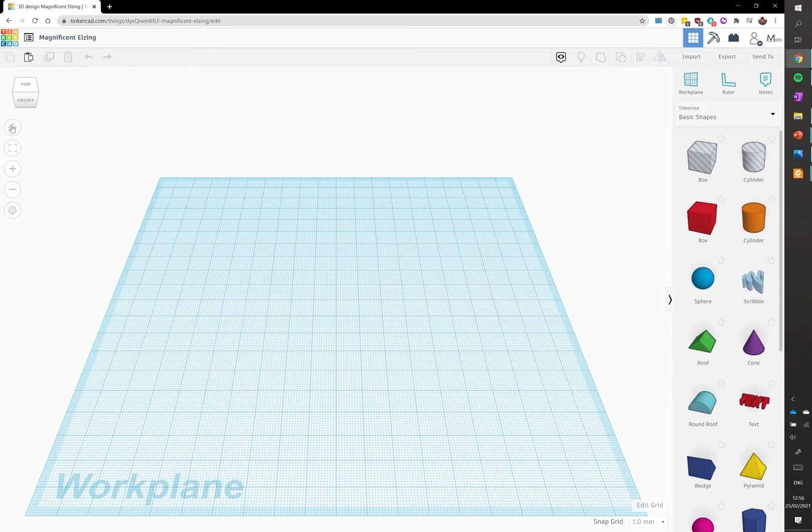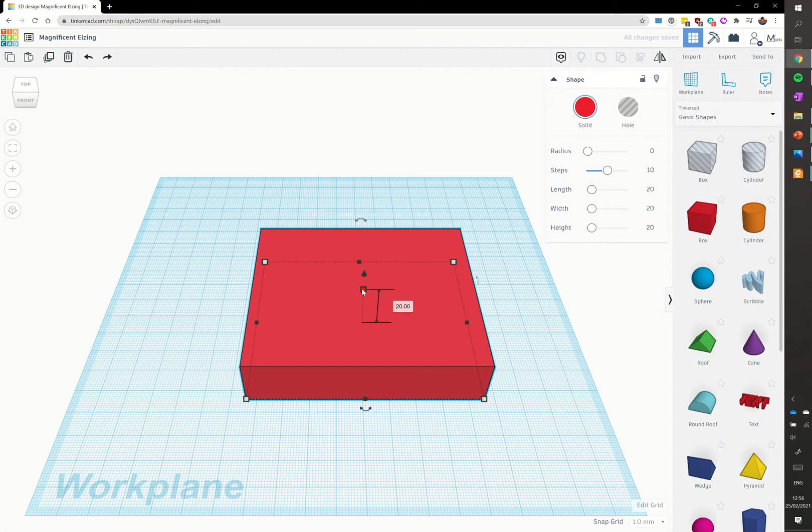Okay, we're just going to undo that. The height, if we click on that, is 20, and that's exactly what we want. Our block is made of wood, so we'll go into solid and change the colour to this kind of light brown to represent the pine we'll be using in the workshop. So that's our base stand.

Next up we have the two sides of the base. Again we're going to go for the box tool, drag that out and position it there. We want to change the dimensions again, so this here is going to be 80 long by 25 wide, and it's going to stay at 20 tall.

What we're now going to do is move this up. We can drag this up and you see it's coming off the floor, off the surface, so we can change that to 20 - you can just drag it to 20, though I find it easier typing it in. That changes to 20 there, and then we can drag that over our block.

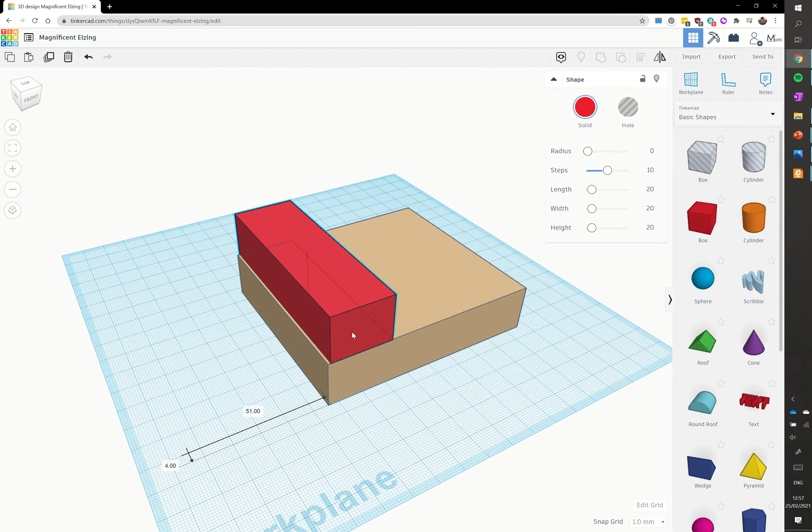Now, it can be quite hard to line things up if you're using a mouse, or a trackpad. I've lined it up there, but if yours is off, what you can do is use what we call the align tool.

So we've got that block selected, you can see the white markers around it. I'm going to hold shift on the keyboard and click on the other block, and that's them both selected. Then I'm going to go up to the menu and click align. I'm going to click on the main base block, then click on the left hand side, and you can see it's previewed it - it's going to move it inside there. I'm going to click on that one there, previewing it again, and it's lined up by those two corners. Okay, what I'm going to do now is click on that block there.

I'm going to go up to the left hand corner of the menu up here and duplicate. If I click on this, you'll find it has duplicated the item first, so it's kind of copy and pasted it.

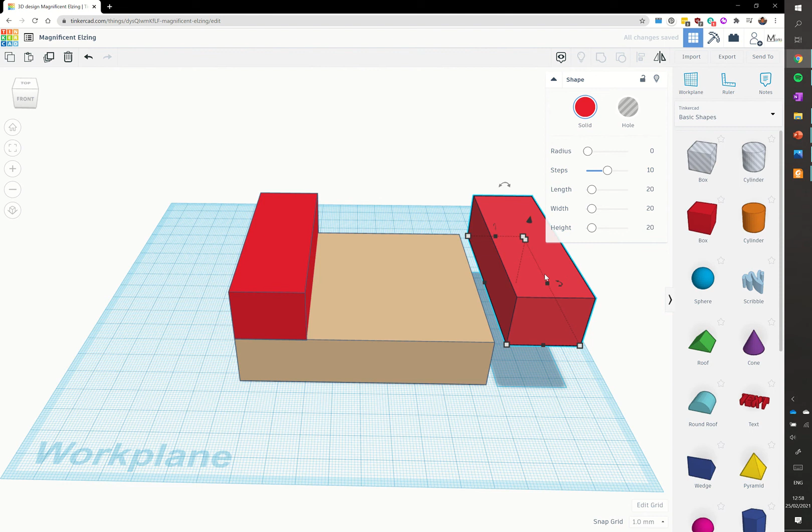I'm going to hold shift and click on the base here, then use the align tool again. I'll click on the base, click on that inside one, then come around and click on that front one there. So that's all lined up.

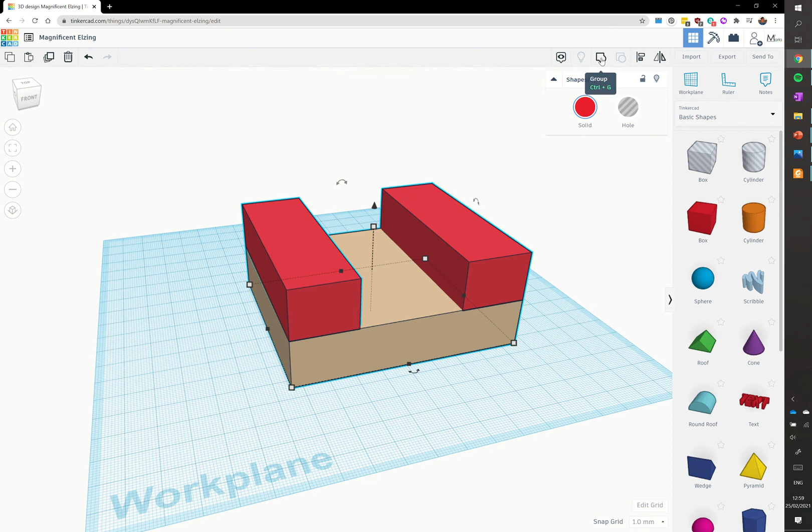I've just deselected it all, but now I'm going to select them all, holding shift, so I can click on select all three. I'm going to go up to the group tool, that's the group button, and that means they're now a solid block. You might need to change the colour again, so I'll change that to light brown. There we are, so we've got our base block there.

I'm going to grab the box tool again and just place that there. Again, I'm going to drag that out so it's 90 by 80. So we've got our block there.

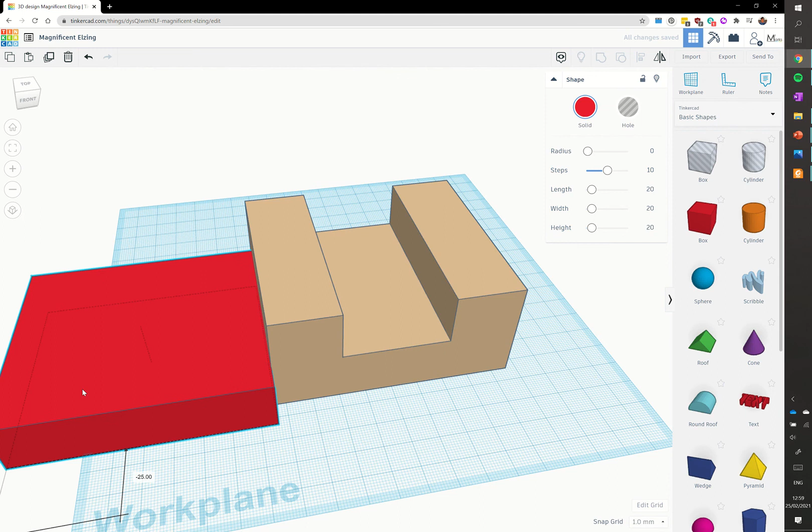Now we need a hole in the top of this block, so we're going to add that before we move this on top of our thing. We're going to go to the cylinder tool. You'll notice there's two cylinder tools here - we've got these ones with kind of shaded stripes, which means it's essentially creating a hole. I'm going to click on that, drag it in, and resize this by typing in those boxes. I'm going to type 30 on both of them, because it'll be drills, it'll be circular.

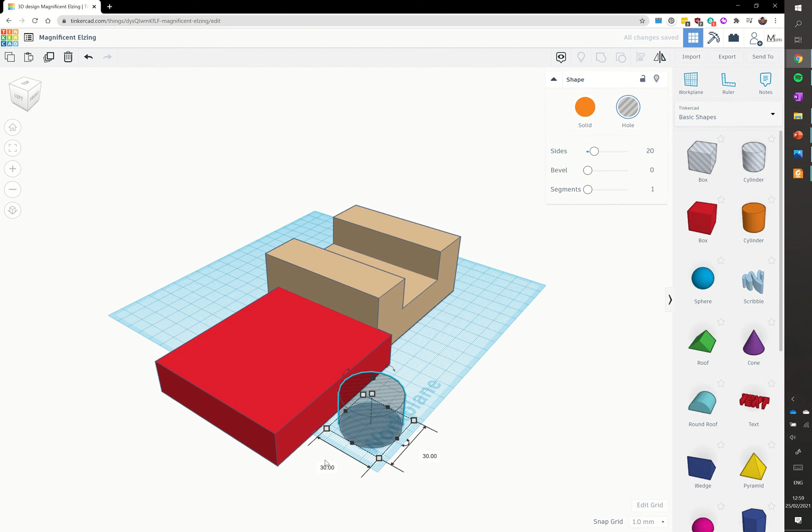Again, I'm going to hold shift and click on the other block, then go to the align tool again. I'm going to click on the red block and hit the center one, so it's centered that way, and also centered on that one. That may have appeared on the other side for you, but it doesn't matter as long as it's centered. With those two items still selected, I'm going to press the group button, and you'll see we now have a box with a cylinder in the middle of it, which is exactly what we're looking for.

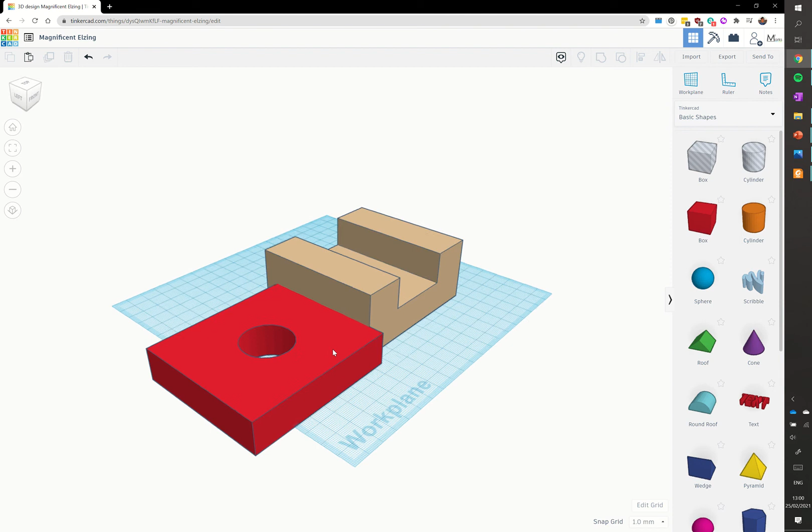What we can now do is move this up - it needs to go up 40 for our 2 layers. I'm just going to type that in, find it easier. And then we're going to align these up.

Again, I'm going to use the align tool. Holding shift, select the base block, click the align, click on the base, and then I'm going to click - oops, just make sure I get the right one here. Sometimes you have to move around so you can see the right bit. I'll click there, come around this way, click there, and that's it, nicely lined up.

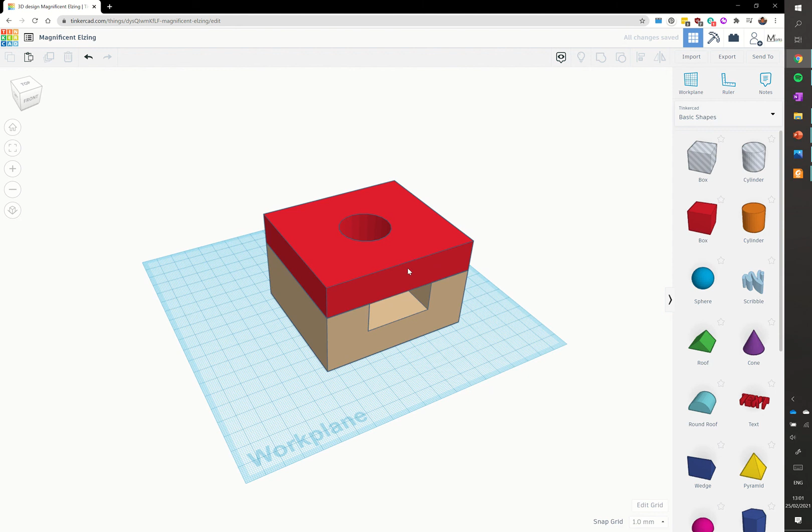So now I'm going to hold shift, select those two, and group them. It tends to go to the colour of the last block you created, so I'm just going to change that to light brown. So that's a base block created there.

I'm just going to move that off to one side there, and that's our first tutorial. We've got our block created, we've got a hole where our drawer goes, and a hole where the sweets will fall through on the top there.